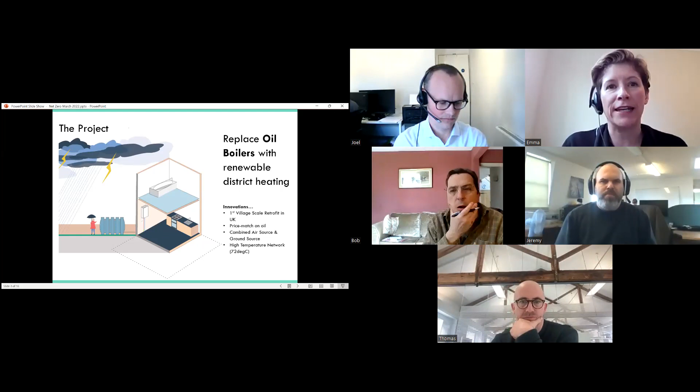So the aim of the project came on the back of building some homes in the village, and it's to replace the oil boilers and electric heating with renewable district heating. We believe we're the first to do it at a village scale retrofit level, and the idea was there'll be no barriers to entry and that we can achieve high temperature water around the whole village, regardless of the type of property that you occupy.

So the project has been evolving, as Joel said, over the last 4.5 years. It works off a remote solar farm, which is about 8 miles away with a private wire, 120 ground source heat pumps, an industrial air source, and that takes hot water around the village. So if you imagine the energy centre is like the heart, we've got a series of pipes and valves as arteries and veins, and that takes the hot water around the village to people's houses. Once it gets to their houses, they have a heat interface unit, and a little bit like an umbilical cord, the hot water going around the village transfers the heat onto your private network inside your home.

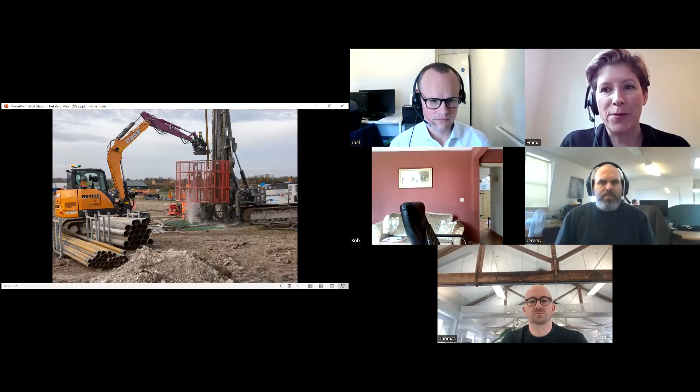So these are a number of the boreholes out on the field one frosty morning. This is them a bit closer up. We haven't struck oil or water. The drilling process does require an awful lot of water. These pipes are going down about 200 meters and are installing the closed loop system. As I said, we have about 120 of these boreholes across the field. They're spaced at 20-meter intervals to stop permafrost or the pipes nicking the heat from one another. And they will be our primary source of heat during the summer.

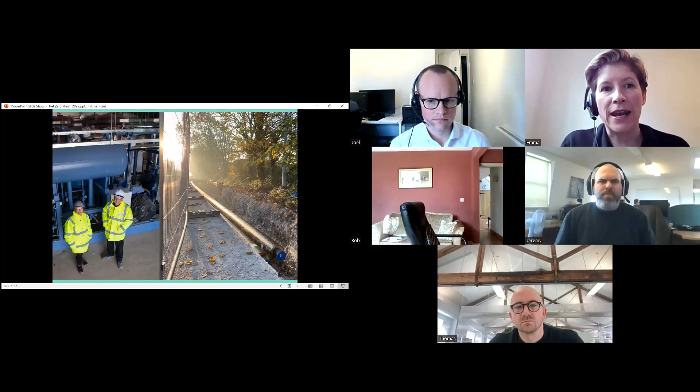We also have an energy centre, and inside the energy centre, we have 3 large air source heat pumps, and we have a series of pipe networks around the village. So 7 kilometres of pipe are going around the village, really well insulated, taking the hot water to people's homes.

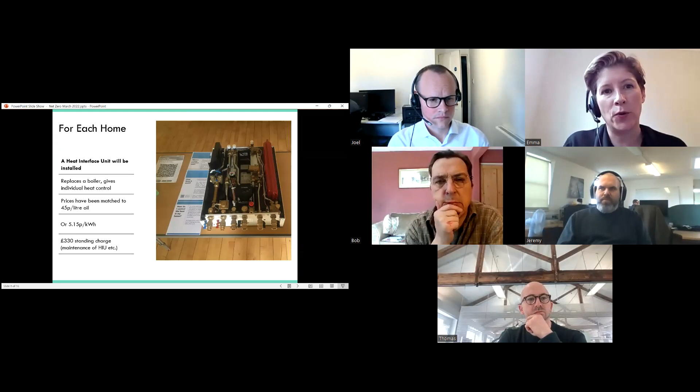So in each home, there'll be a heat interface unit. So this is the heat interface unit. So instead of an oil boiler and a big oil tank in the garden, this individual heat interface unit will just sit on a kitchen or in a utility wall. They can also go outside as well. And this will basically bring the hot water to your home, and it will connect to your hot water system inside the house and also the central heating.

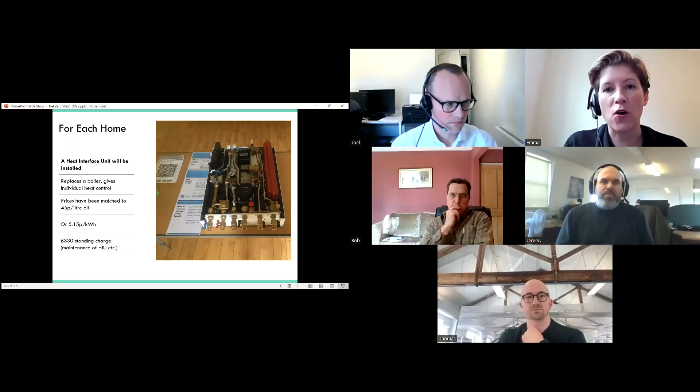We price matched that this project would always be cheaper than oil, and we price matched at 45 pence a litre. For anybody who is currently on oil, you will suddenly realise that the prices when you order your oil to fill your tank have gone through the roof. Incidentally, my brother-in-law, who normally spends £400 on a regular oil delivery, has just been quoted £1,600 for his oil delivery. So the cost of oil has gone up disproportionately, literally in the last couple of weeks, and is causing massive issues in terms of fuel poverty for many homes, especially in rural areas.

So we've been working alongside the residents. This project has been evolving. As mentioned before, it was one of possibly the first of its kind, or at least the first of its kind we know of, dealing with lots of different ownerships in a village setting. And one of the first things we learned was we had to look professional. So what we've got is a community liaison person to assist us.

We've got a logo, we had newsletters, we went around the village, we took the heat interface unit to people's homes. We've done a walk with the engineer around the village. We've really spent a lot of time working with the residents, telling them about the project, telling them it's coming, and explaining to them that this is very different. This is a high heat network. As I say, it's 75 coming out of the energy centre and 72 degrees guaranteed to their home.

For the last 3 years, we've had heat monitors on 3 different types of homes. That data is live streamed out anonymously on the County Council website. And all this information that we've got is benefiting other communities. But it's safe to say nobody really knew what our heat demand might be. So we've been collecting that data, which is now available for others.

One of the real key drivers for us was also working with the housing associations. As mentioned, there were 40 plus housing association homes in the village, and actually the cost of living even 4 years ago was high on oil, but now is absolutely crippling for many of the households in our village, and therefore this project couldn't come quick enough.

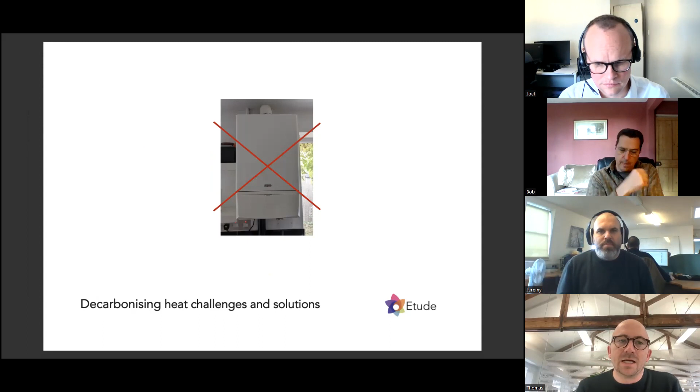I work for Etude. 80% of our work is on building projects, residential projects, small or large, non-residential projects, but we do about 20-25% of our work on policy. And I see that Emma Davis is on the call. So hello, Emma. We've worked with Bioregional and Emma on the Greater Cambridge Local Plan, which is very relevant to the discussion today. And we've also worked on a renewable energy analysis for the island of Bermuda.

And if I may, I just want to echo what Emma said. As part of this exercise, we had to engage with the public quite a lot. And of course, we had to deal with the minority who tends to be really disruptive and vocal on social media. But we also realized that the largely silent majority is very, very in favor of those changes. And I think it is the case for decarbonizing heat as well. We have to learn to engage with the public positively, but there is a huge level of support out there for these moves now.

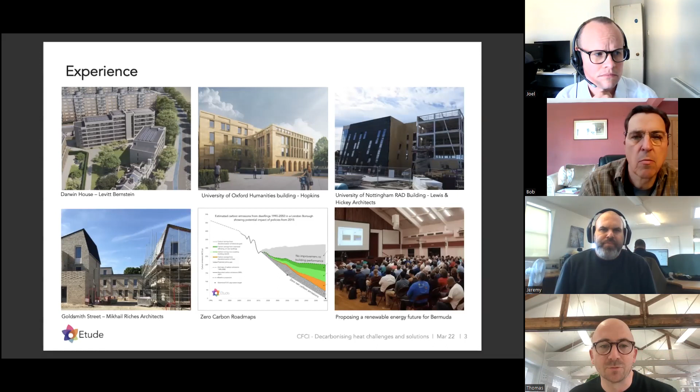I just have 3 slides on the context. I think most of you have seen probably 1, 2, 3 of those slides before, but it's really important that we keep on reminding ourselves what's happening and why we do this.

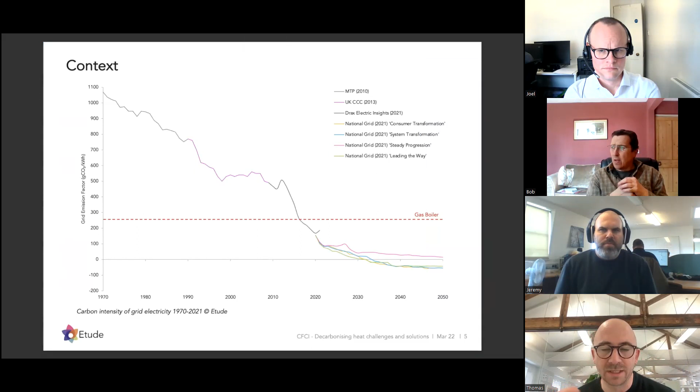So this is the carbon intensity of 1 kilowatt hour of electricity. And we obviously know now that 5 years ago, electricity has become lower carbon than gas, and it's predicted to be even lower carbon. So that's why this move away from gas now is so critical, because the gap will only ever increase.

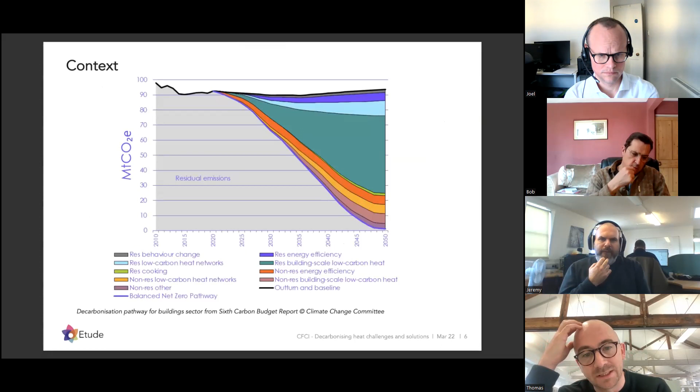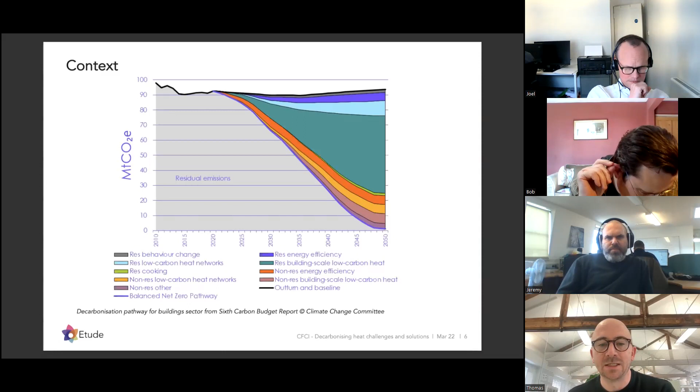This is an extract from the Climate Change Committee report, and it's looking at how we need to decarbonize over the next 30 years. And you see the kind of greenish wedge here. It is residential low carbon heat. And this bit here is the non-residential building scale low carbon heat. So more than half of our way to decarbonize is this challenge of heat that Joel is talking about. So it's absolutely critical that we do something, and quite quickly.

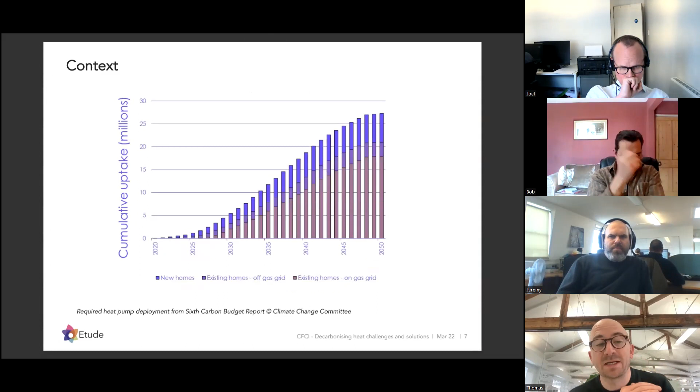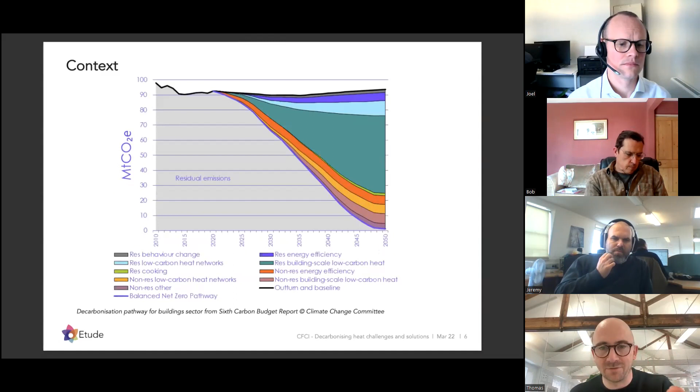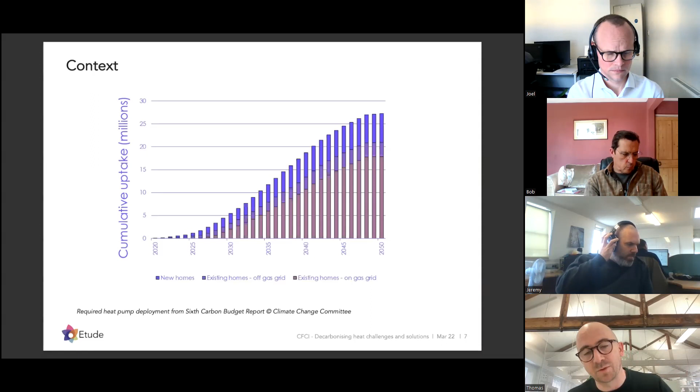And this is another extract looking at the expected uptake of heat pumps that we need to deliver this. So there's a direct connection: if we want to decarbonize and deliver this, then this needs to happen. And we all know that the numbers look quite scary compared to the kind of 20,000 heat pumps a year we used to. But this is what we are trying to deliver.

And most people, when they say heat pumps, they mean one type. And actually, we need to acknowledge that there's quite a variety of heat pumps, and especially for the complex projects, it's 100% worth taking the time to consider which type is available, and then compare them with each other. So the first message for me is really important: for complex projects, there's not a single heat pump solution. There are different solutions, and we need to compare them as fairly as possible.

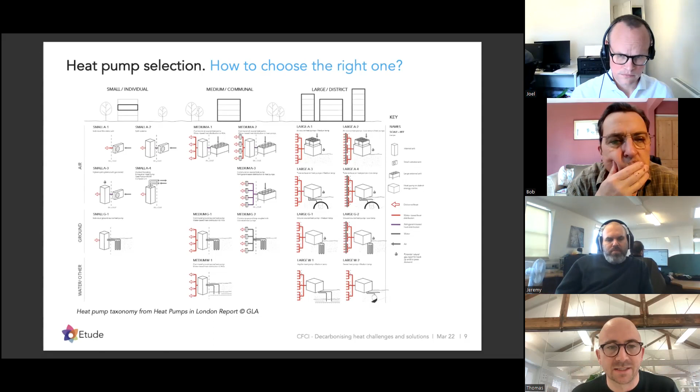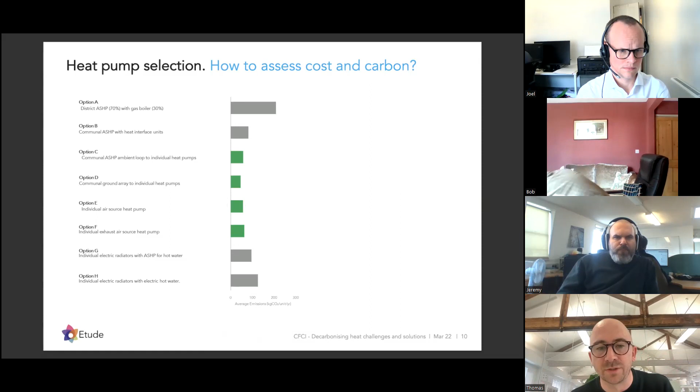One thing we're constantly finding on projects when we move to stage 4 is the importance of distribution losses when heat is distributed at a temperature of, say, 60, 65, 70 degrees. So here we're looking at a scheme of about 60 units, and it's just air source heat pumps on the roof, distributing heat at 60 degrees to heat interface units. So we're not talking about a district heating network. It's a fairly simple building level distribution system.

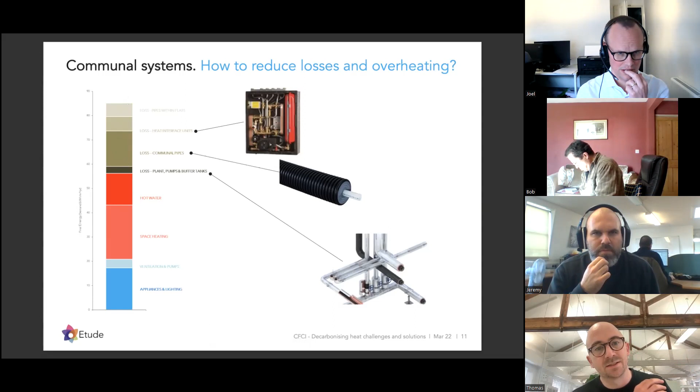And this is the split of energy consumption for a typical home per square meter. And in this particular case, you could see that the proportion of losses from the heat interface unit, and in particular the communal pipes, are really significant. So more and more with heat pumps, we're going to need to be really careful about not wasting heat by distributing it at too high a temperature.

Energy cost is a growing concern, and it has always been a concern behind the move to heat pumps. Interestingly now, of course, with the gas crisis, we're seeing a shift where suddenly heat pumps are not only seen as the scary new solution which may increase energy cost, which is always a kind of a myth anyway. But one great thing about heat pumps is that if they're integrated in a way which enables the home to make use of dynamic pricing, it could actually be a fantastic way to cut down on the energy bills and make the most of the time when electricity is lower carbon and lower price.

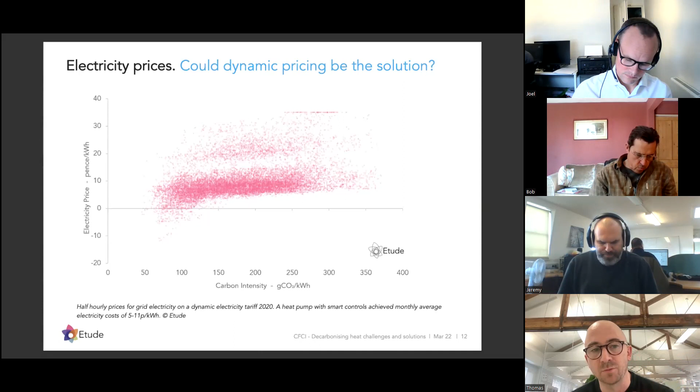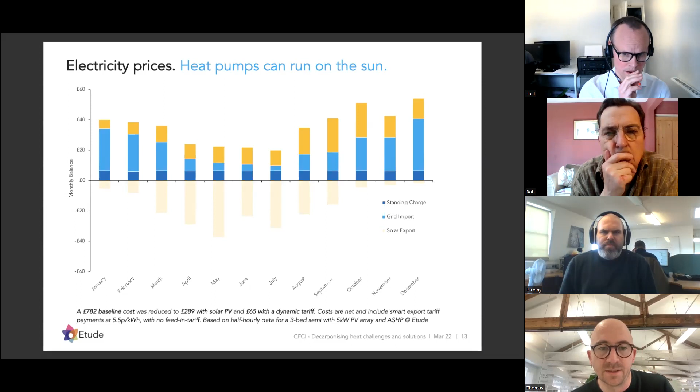And the other big thing, I think, which is slowly being realized by everyone is, as we need to contribute towards more renewable energy generation, there is going to be more and more renewable energy generation on our roofs. And our ability to make use of that electricity generated by the solar PVs to cut down our energy bills is going to become more and more important. This graph is showing the ability of a PV array to significantly cut down this energy bill, either because solar PV is directly used by the home or through the exports.

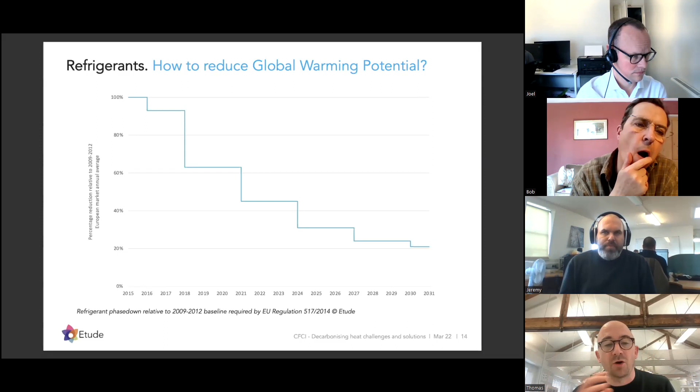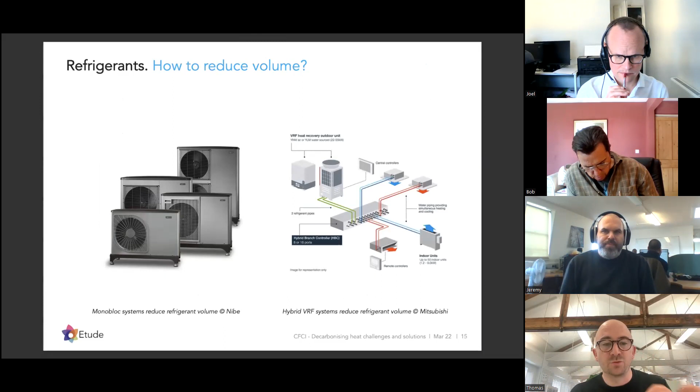And I think another challenge of heat pumps, which I wanted to talk about, is the issue of refrigerant. So on one hand, we've got significant international agreements which create a very good framework for refrigerant not to become an uncontrollable environmental impact of heat pumps. There are some clear directions of travel in terms of phasing out some refrigerants. On the other, there's still a lot we can do on projects. So picking the right refrigerant is, of course, an important one, but also finding ways to minimize the refrigerant volume. And more and more people are starting to quantify the embedded carbon of heat pump installations. So, of course, the type of refrigerants and their volume have two clear implications on the embedded carbon.

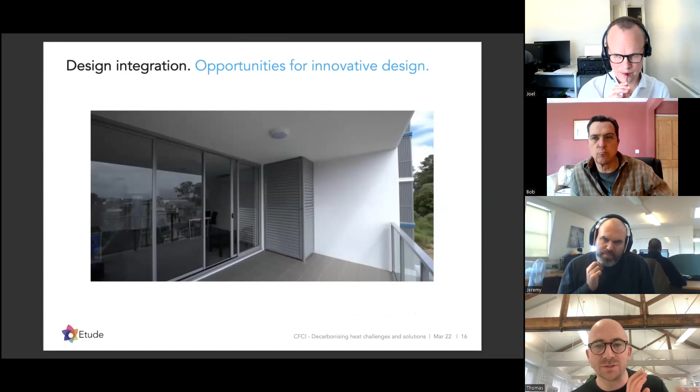And finally, we're seeing on projects a desire from architects to not only fight against the integration of individual heat pumps, but to see ways to integrate them. And hopefully we're going to see that more and more. So, communal heat pumps for blocks of flats are generally located on the roof, and they're easier to integrate. But more and more we're seeing smaller blocks of flats, 8 units, 12 units, for which a communal system may be over the top in terms of maintenance legacy, trying to find ways to integrate heat pumps at an individual scale, feeding each apartment.

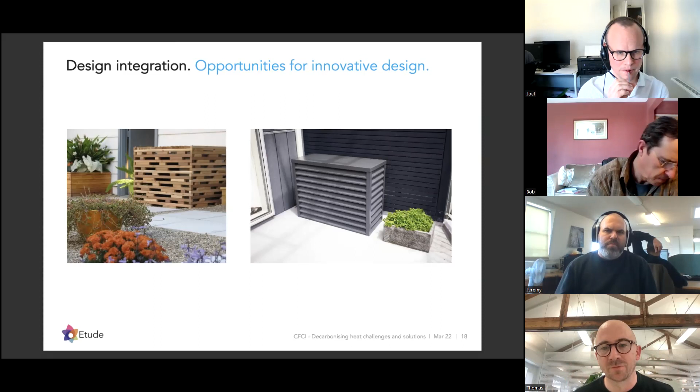And personally, I love the look of a heat pump, but I don't think it's the case for everyone. And these are 2 attempts to hide them without disrupting too much how they work. So yeah, lots of different themes. I wanted to share with you some of them, and I'll hand over to Joel.

Thanks, Thomas. That's fascinating, and hopefully very, very insightful for many people. I think that's a perfect tee up for Jez to talk through his experience supplying heat pumps to the mass market, and the challenges that he comes up against. Jez. Yeah, hi everyone. I'll just get my slides up. All right, there we go.

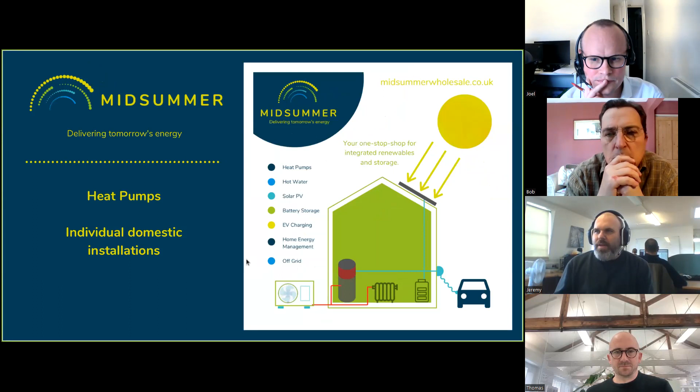So hi. For those of you who don't know me, I think a lot of you do, I'm Jez. I used to work at Max Fordham in Cambridge, working on a whole load of college projects and university projects and various other things. And a year and a half ago, I resigned to come and be the head of renewable heat at Midsummer. So probably not many of you have heard of Midsummer. But what Midsummer is, it's a renewable energy wholesaler based in Cambridge.

The company is 16 years old. It started off as an off-grid PV installation company when the founder Andy fit PV to his boat and then his neighbour's boat, and then it kind of grew from there into grid-tied PV installations. Then it started wholesaling and became a fairly big solar wholesaler. It was one of the early ones on batteries and EV charging, and then Andy persuaded me to join to start doing heat pumps as well.

And so we're now a kind of full spectrum domestic renewables wholesaler, and with the PV it scales to commercial as well. We're based in Cambridge, with 55 people working for us now, give or take, and turnover about 40 million a year at the moment. So it's a pretty significant company, just taken on new premises in Cherry Hinton. So what we do is we wholesale renewable energy products to installation companies, who then install them on people's homes for the most part.

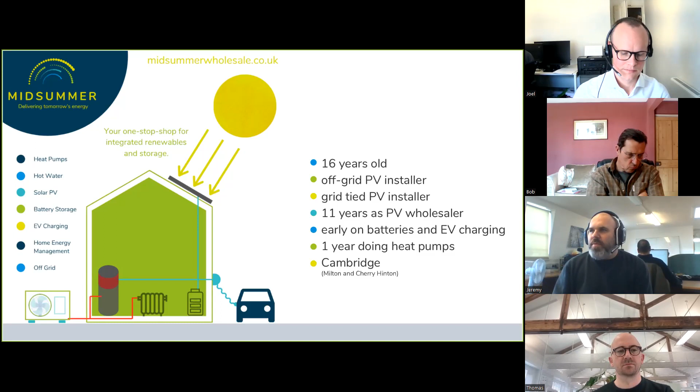So I'll kick off with the heat pumps. Now, the first thing I wanted to say about heat pumps, which is absolutely critical, that is so often just misrepresented for no good reason, is people always say, oh, you need to have a really well insulated home to have a heat pump, which is completely untrue. The heat's got no idea how much insulation's in the wall.

Your heat pump extracts heat from the air. It puts it into the water in your heating system, which circulates around radiators typically. The heat comes out of the radiators into the air in your house, and then from the air in your house, it goes out through the walls back out into the outside air. So that's what the heat's doing, and all you're doing is pushing it through that cycle with a bit of electrical energy. And as long as the total amount of heat going into the house is no more than one heat pump can produce, the cost of the installation doesn't get crazy high.

And obviously this heat transfer from radiators to house, that's kind of a pinch point in this process. So if the radiators need to be very big, then that can be kind of practically problematic. And so that's where a very poorly insulated house can be difficult. But there's absolutely no reason that a heat pump can't heat a badly insulated home.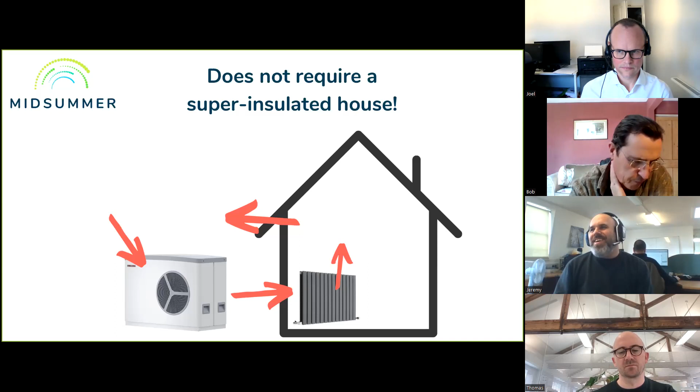And it is absolutely better to meet an unnecessarily large load with a low carbon method than with a high carbon method. It's better if you can reduce that unnecessarily high load in the first place. But if for whatever reason you're not doing that, it's not okay to just shrug and go, I guess we'll just keep the boiler because the heat pump won't work. So that's a major bugbear of mine. The heat pump doesn't know about the insulation.

But so this presentation is a fairly nuts and boltsy presentation about the kind of day-to-day practical challenges of the heat pump retrofit job, and also about the kind of organizational challenges and the skills challenges. So this slide is taken from a training presentation I've given to a few solar companies, explaining to them things they need to go through with homeowners when they're selling them a heat pump, if they're moving into heat pumps from solar.

So I thought it was a good one to introduce here, because the key things that an average homeowner who's got a boiler has to deal with is that they've got to give up some outside space for a heat pump, and they've got to find a spot for it, and that might be something that they're not super keen on, but it's a fact of life. They will have to find a space for hot water storage, which they may already have if they've got a cylinder. But over 2/3 of houses have combi boilers, so a lot of people now don't have space currently allocated for hot water storage. So they're going to lose that space.

The radiators may have to get bigger, and we'll talk a bit more about that later. So they may have to have some radiators removed and replaced with bigger ones. Another thing is people will have to culturally get used to low temperature heating and weather compensation, and the slower response that their house has, that you can't let your house get cold and then try and heat it up fast. It won't be good for the heat pump's efficiency.

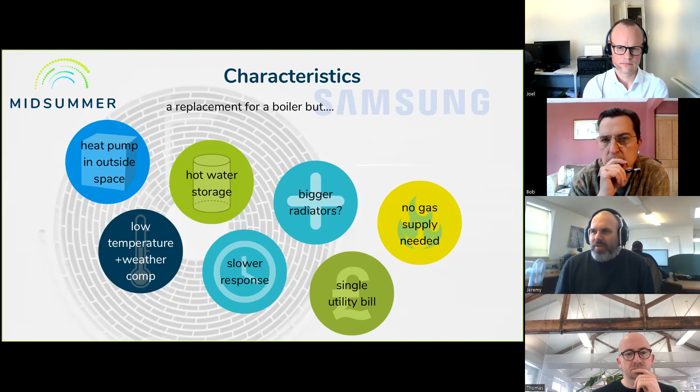And then the last thing is they go to a single utility bill, and this slide did until very recently say single bigger utility bill, because there was a real danger that with a heat pump you could end up actually paying more for your utilities. But now, fairly recent development, the new price caps, it's now just definitely going to be hundreds of pounds a year cheaper to run a heat pump, unless it's really awfully installed. So with even average luck on the quality of the installation and the COPs achieved, it should be cheaper to run.

So another thing on space, I used to do schematics which had a load of symbols on back when I was a consultant, but for the installer market, it's much easier to give them a photo. So here's a heating schematic with a load of photos of bits of kit on it, but you have to find a home for all of those, and they're not all to scale here, but it is more stuff to fit in the house for the most part, and there's nearly always a bit of a loss of space inside the house.

And now people have done some things where they've put these things in pods that can be dropped down outside the house, and that's fairly common actually in the Netherlands. When they retrofit heat pumps, they'll drop these pods in outside everyone's house and then just connect the pipes up through the hole that the flue used to go through. But it's yet to catch on in a big way here, so most of the time it's a loss of space.

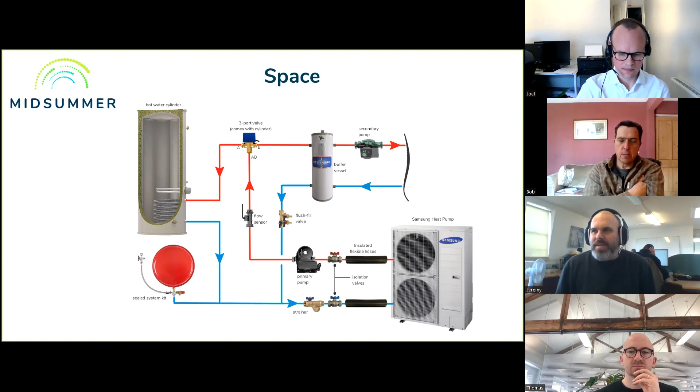And then low temperature heating. I mean, low temperature heating is more of a cultural issue than it is a practical one, in that heat pumps are most efficient if you can run them at lower temperatures. And the lower temperature you can run them, the more efficient they are, and therefore the more carbon savings you get and the cheaper they are to run.

Now, what that can often mean is that the radiators in a house aren't big enough, and there's a huge variability on this. Speaking to some of the bigger heat pump installation companies that we sell stuff to, they reckon on average they replace about a third of the radiators across all the mixed housing stock that they put heat pumps into. But some houses that's practically every radiator, and some houses it's none.

In fact, Joel's dad's house had a heat pump retrofit, one of the first heat pumps I sold, and that was a fairly new home, I think only 10 years or so old, and none of the radiators needed replacing, and the heat pump runs at 45 in the very coldest conditions. So it's not usually too much of a challenge, but it can mean some radiator replacements.

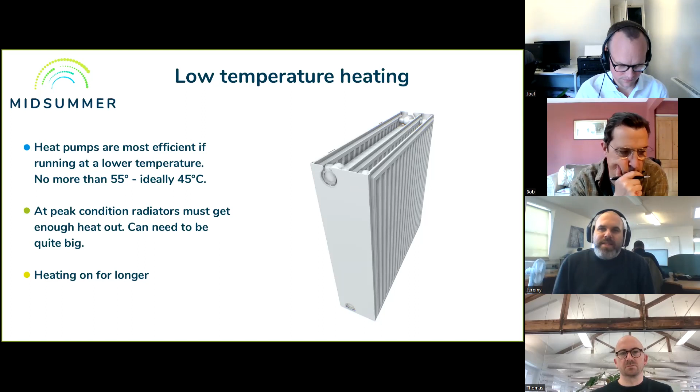But the main thing is it means the heating is on for longer, and I always kind of liken it to making pulled pork. It's a gentle simmer. It's a low, slow, just gently pushing enough heat in to overcome the losses. And actually, there's increasing encouragement to people to test this, because if you've got a combi boiler, you can normally just turn down the flow temperature and see how it works.

But it's actually nicer because all the surfaces in your house get evenly to the air temperature, and you don't have hard convection currents churning around as your radiators are at 75 degrees. You get less radiant asymmetry, and it is actually just better to have low temperature heating.

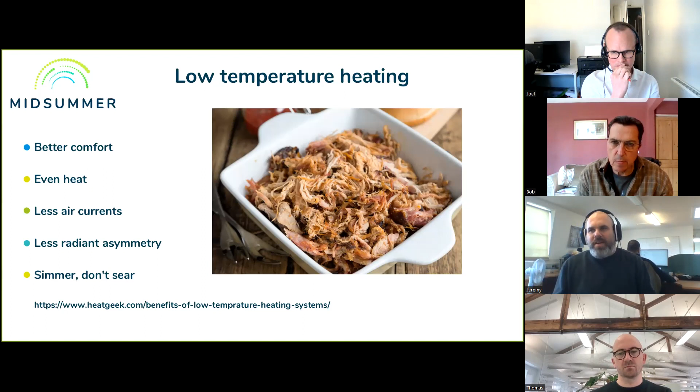But it's difficult to persuade people that it's lower energy and more efficient to do it, because the natural logic of their brain is, if my heating's turned off, then I'm not consuming any energy for heating, and when I turn it on, I am during that period. But actually, you've got to meet the overall heat loss of your home through the day, whether you meet that in a short period or a longer period. And turning the heating off and letting it drop by a degree or two doesn't massively reduce the heat loss. It just means you're having to put that heat in a much shorter time.

So the other thing heat pumps do, which boilers should have been doing for a decade but very rarely have, is weather compensation. And that means that the flow temperature of water into your heating is lower when it's warmer, so that it can go along all day running at 30 degrees to meet a smaller heat loss, as opposed to running at 50 degrees for 2 hours to meet that heat loss.

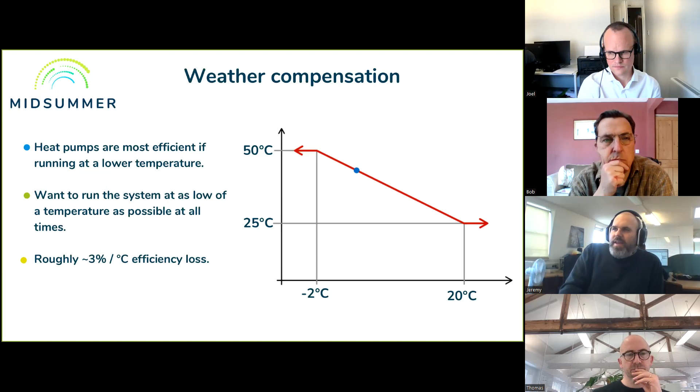And the reason this is so critical is because, roughly speaking, for any given set of external conditions, a heat pump's about 3% less efficient per degree hotter you make it run. So everything you can do to get your heat pump running a degree or two cooler makes quite a big difference. 3 degrees is 10%. It's a big deal, and that's why you run it constantly. So it's just putting in enough heat, and it's why you weather compensate as well.

So one of the challenges of the heat pump retrofit is the skills gap in dealing with a slightly more sensitive heat source. So at the moment, if you call up a heating engineer to come in and give you a replacement boiler, they'll walk in, look around your house a bit, think for a moment, and then they'll choose a boiler that's over 30 kilowatts routinely, regardless of the size of your house. They might go up to 40, might be 28 at the bottom end if you've got a very small house. And actually, with gas boilers, there's not terrible consequences to massively oversizing them.

So they do cycle more, and that does cause a lot of inefficiency, and they produce a lot more heat than they need to, and heat up the heating water in your house very quickly and turn off. And the real efficiencies of gas boilers, it's turning out, are pretty poor. It's just very rarely ever measured.

But it becomes clear when you've got a heat pump that's got monitoring, and so you know the exact amount of heat that you're putting into the house after the heat pump retrofit. And then you look at what that must have meant for the boiler efficiency, and it turns out lots of boilers with badged efficiencies of 92% are actually running at more like 70% efficiency, and sometimes even worse. But nobody ever really noticed because gas has been so cheap, and it's been such a small part of their expenses, and they've never had the data to analyze it.

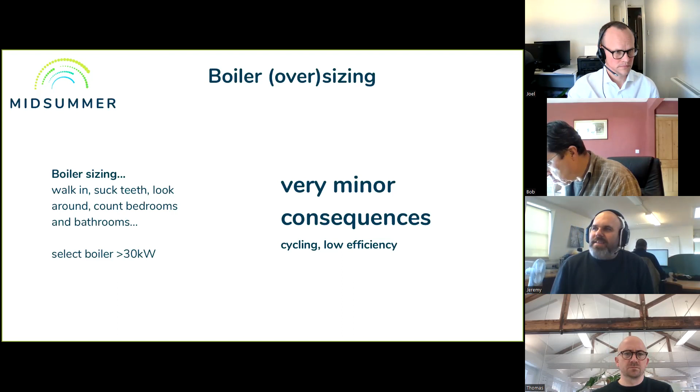But in the case of heat pumps, for an MCS heat pump install, you're required to do a room by room heat loss calculation and heat emitter check to make sure that, firstly, the heat pump is big enough to meet the whole load of the house, and secondly, that the heat emitters in every room, whatever they are, will put enough heat into that room to maintain it at the temperature it needs to be.

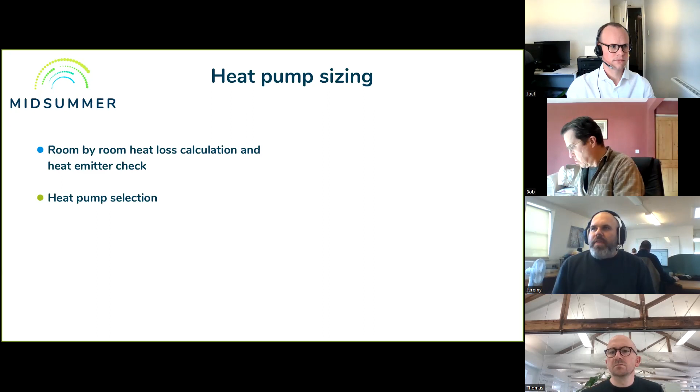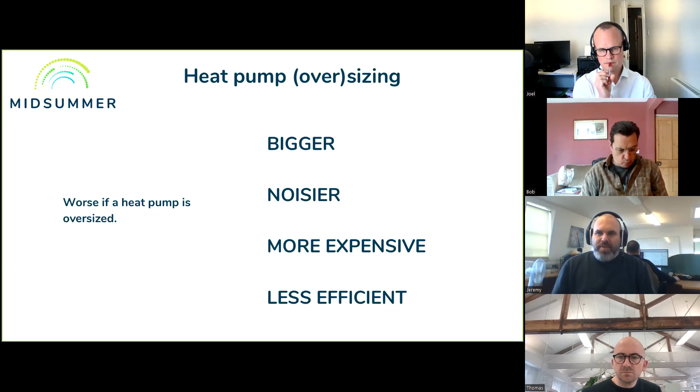And that's very important in the case of heat pumps, because whereas with a boiler, oversizing it doesn't have terrible consequences, with a heat pump, it can be problematic, because if you make the heat pump twice the output it needs to be, it's bigger, and they're already slightly unnervingly big to some people when they've got their outside space to give up, and they get noisier, and they get more expensive, and they get less efficient because they suffer from cycling in the same way that boilers do, but actually they suffer worse effects from cycling a lot.

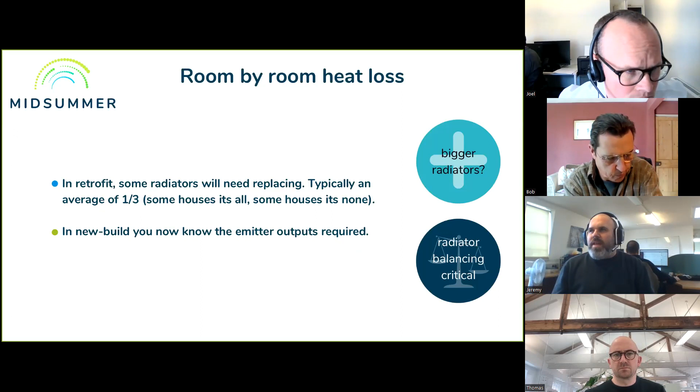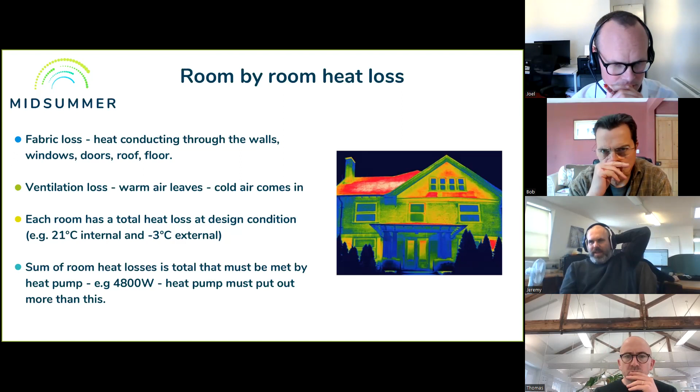So in new build, the heat emitter output's required from a kind of paper calc, and so it gets a bit easier. So some of you will have done heat loss calcs. Most of you will be familiar with the concepts. You've got to do the fabric loss, so conduction through all of the surfaces of the house, ventilation loss, which is warm air leaves, cold air comes in, the leakier your house is, the more that is. And then you've got to design condition, sum them up, and get the heat pump size. But this is a bit of a lost skill.

So back in the early days, it's interesting, I've learned some of the history of the central heating rollout in the UK. In the early days of the central heating rollout, British Gas went around fitting gas-fired central heating to loads of people's homes, and they did do heat loss calcs, and they did try to select a boiler that was no bigger than it needed to be, because they were very expensive at the time. And that was all done properly, but it's been lost now. The combi boiler means it's not a necessary skill anymore, and nobody does it. And so it's very difficult now to skill up the industry of sole trader heating engineers.

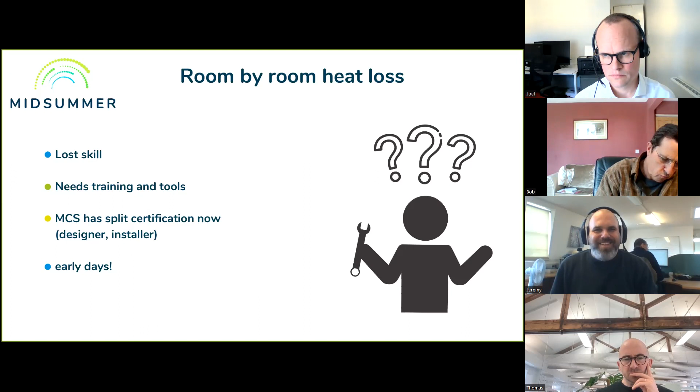So the MCS has split the certification into a designer and installer certification, although it's still a bit clumsy. So me, as a chartered engineer with 15 years experience of designing heat pump heating systems, would have to go on about 5 days of courses to become an MCS certified system designer. And I'd have to learn things that would be of no use to me whatsoever in that role. So that's a problem.

So I think this is probably the biggest challenge, this conversion of the industry from the sole trader model to a model where people can skill up. Because in the sole trader model, apprenticeships aren't popular, and even when they are, people only learn from the person who they're apprenticed to, who may not have these skills.

Then the other issue is, MCS certification's a hurdle for those sole proprietors, so a lot of them are very scared, maybe, or certainly can't be bothered with the effort of training up as heat pump installers and getting their MCS certification, which is a lot of paperwork and a lot of annual capital outlay to maintain the certifications. And so at the moment there's over 120,000 Gas Safe Register members and less than 1,200 MCS heat pump installers.

So there's a hell of a long way to grow the workforce to do this retrofit at the scale it is needed. Now, in the same way that with the gas central heating rollout, that was largely British Gas, and it was driven by a small number of large organisations, I think you'll see a bit of that with the heat pump rollout. So E.ON, Octopus, OVO, and other large organisations, the companies who did the smart meter rollout as well, are all looking to have large heat pump install teams.

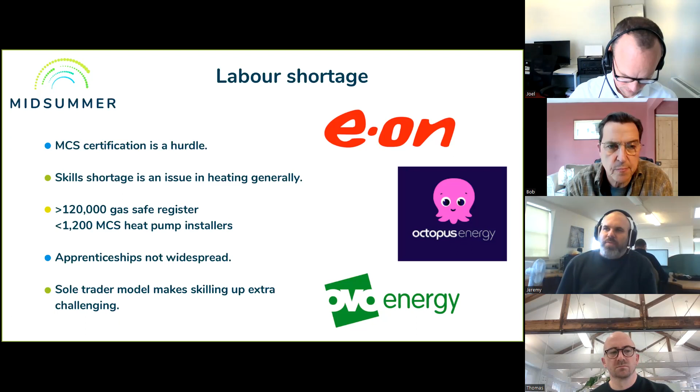And then what we're doing at Midsummer, we've made this software Heat Punk, because I know how to design heating systems and do heat loss calcs. So we've made this free software, which you can use at heatpunk.co.uk, which is aimed at lowering the barrier for smaller installers to do these calculations themselves and do all the paperwork, and give them less desk time and try and get it closer to the kind of working practices that they're used to doing gas boilers.

And that type of innovation, there's going to be more of that about, and more people filling in the skills niches. There will be people training up as heat pump designers and just working with installers who then spend more time fitting.

But Stiebel have spent a hell of a lot of money on that, and they've said to me it was an eye-watering amount of R&D, much more than they anticipated when they started. But they've got them running, but that refrigerant's only available on their smaller units, and they're still doing the work to get it into their larger units, which are still running on older stuff.

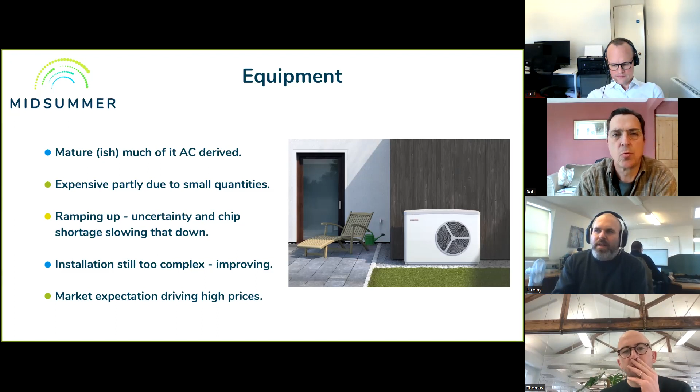So I think we're at an inflection point in the market where it's moving from that early adopter phase into a more mainstream phase, both as a result of equipment developments and consumer choices.

So, just quickly, a thing to say about permitted development. At the moment, a heat pump is a permitted development in England. There's different rules in the 4 countries of the UK, so this is just England, but there's similar rules in other countries. To be permitted development, you have to do a crude noise calculation, which any acousticians in the audience would cringe at. The physical volume has to be...

Jeremy, just to let you know, that's going to be my hook to try and move you on. Yeah, no, we have questions from acousticians.

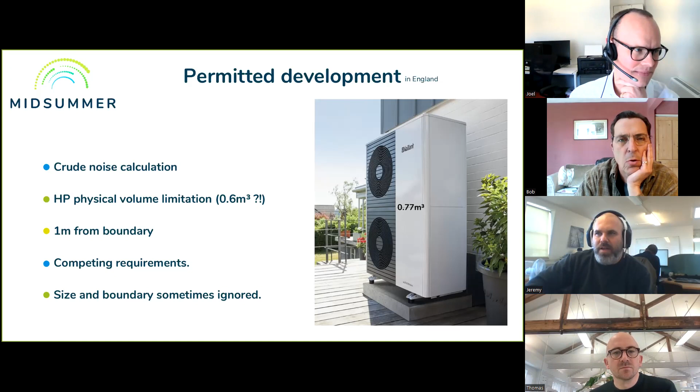Last slide. The physical volume limitation of 0.6 cubic meters, which is a bit of a problem, and 1 meter from the boundary, those are competing requirements. It's easier to make a heat pump quieter if you make it bigger, because you can put more sound shielding in and run the fans slower. And people do sometimes ignore the size and boundary requirements. Now over to Bob.

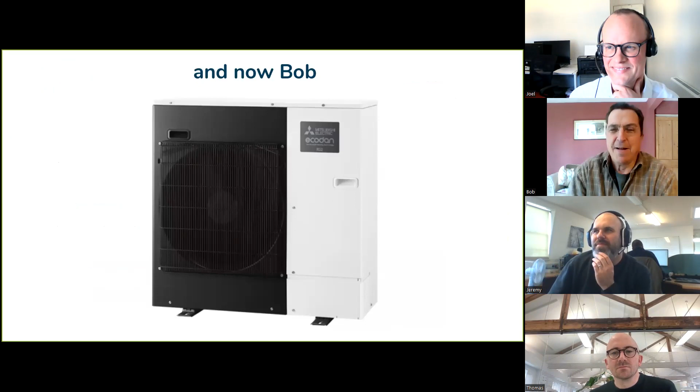Hello, everyone. I've been asked to speak for a couple of minutes about my experience of having an air source heat pump installed at my house. I've lived in my house for 24 years, and I only had it done 2 years ago. I had an oil-fired boiler, and I was spending something in the region of £1,200 to £1,500 a year on oil. The main criteria for the installation was it had to cost less than that to run. I'm pleased to say it costs a fair bit less than £1,000 in electricity a year, and I've got quite a big 5-bedroom detached house.

I suppose one of the key criteria if you're going to do this is you have to have the capital outlay in the first place. But I am getting a renewable heat incentive paid back quarterly over 7 years, so in 7 years' time, the amount I will have actually spent is quite small in comparison to the cost of the installation. The equipment was installed in March 2020 at the beginning of the lockdown, so we all had to learn how to keep away from each other, which was not particularly difficult.

I've got 16 radiators and about 15 square meters of underfloor heating in my house. They ended up changing 4 of the 16 radiators, which were older ones, and made them the double thickness ones. It runs off the Wi-Fi, and I've got an app on my phone where I can control the temperature.